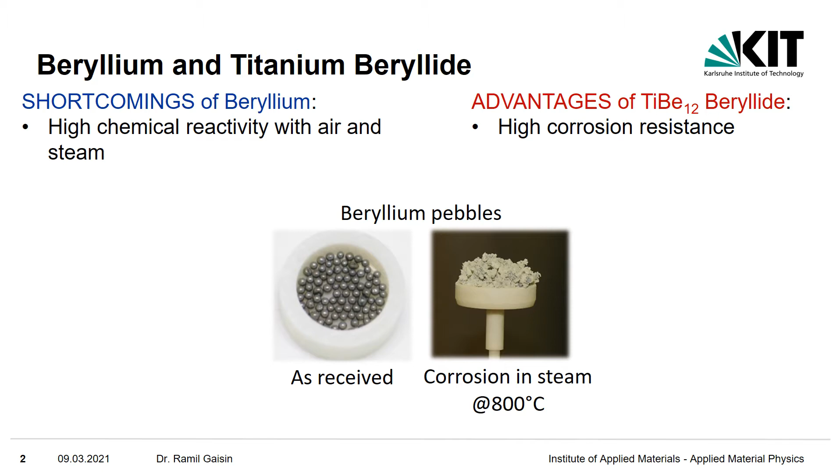For a long time, beryllium was considered the main candidate for neutron multiplication in fusion reactors due to its unique physical properties. However, metallic beryllium reacts strongly with steam and air, as shown here below. Under neutron irradiation, beryllium was intensively forming a very high porosity.

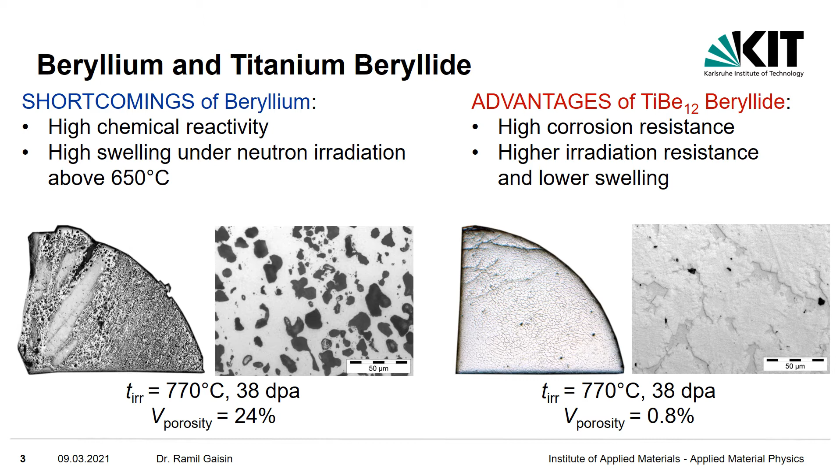All these advantages of titanium beryllide allow it to change the blanket design. I will show you this in the next slide.

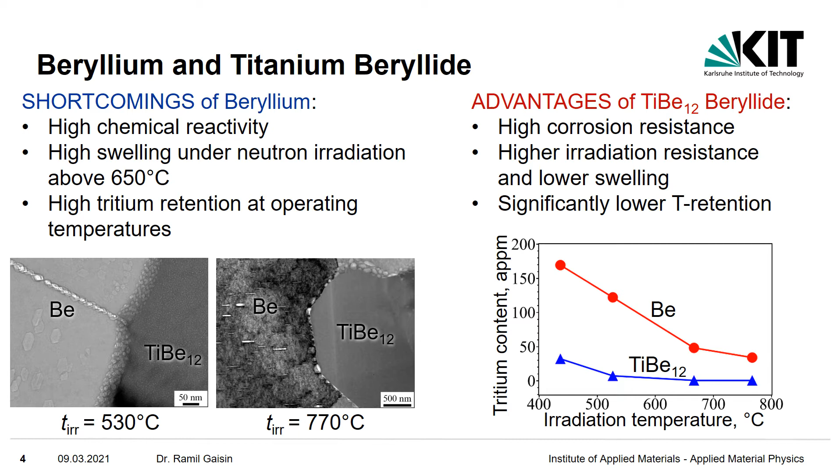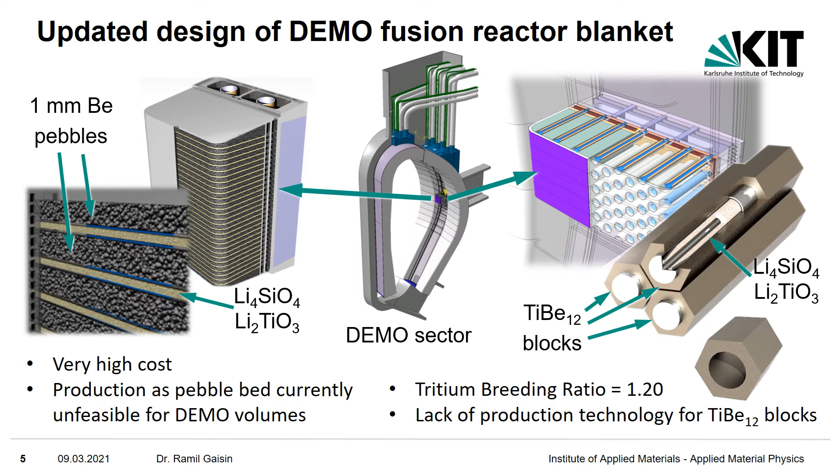The switching to a new material, titanium beryllide, significantly changed the blanket design. Now, beryllide blocks should replace beryllium pebbles for neutron multiplication. Due to a higher packing factor, this design provides an even higher tritium breeding ratio, meaning more fuel for the fusion reaction. The only problem was the lack of technology for the production of such hexagonal blocks from beryllides.

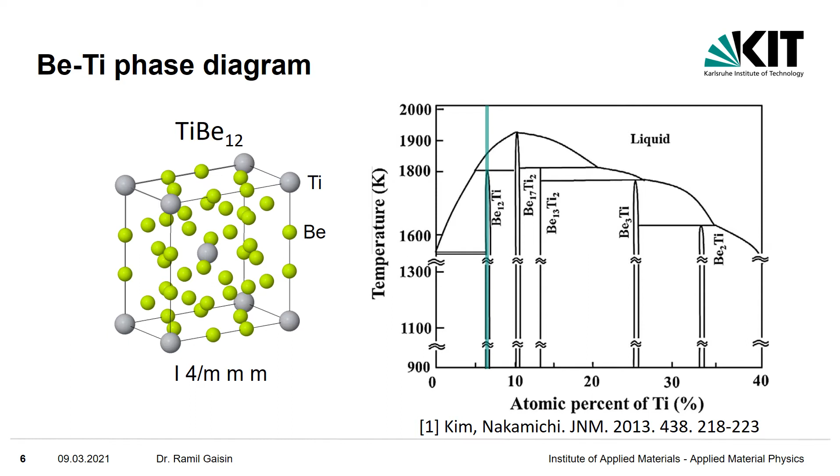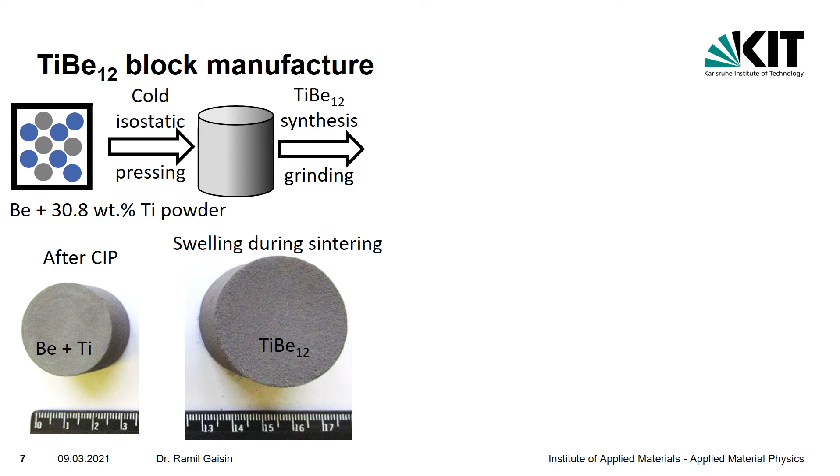That is why we focused on the powder metallurgy route. In the new technology developed in Ulba, pure beryllium and titanium powders are blended together and pressed at room temperature into tablets. During the following beryllide synthesis, these tablets swell intensively, forming a porous material with a low density. But this beryllide can be ground to titanium beryllide powder.

And in the next step, vacuum hot pressing of this powder results in a solid, dense material, which can be machined to its final size and shape.

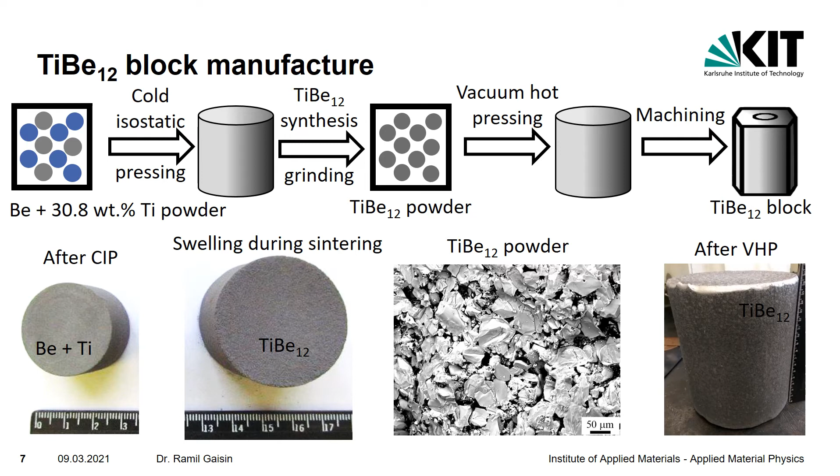At the moment, several blocks of titanium beryllide have been manufactured in industrial conditions using industrial equipment at the Ulba Metallurgical plant. They have a hexagonal shape with a central hole. They are quite large, with 144 mm in diameter and 150 mm in height.

The material has an almost single-phase titanium beryllide with only traces of beryllium and beryllium oxide. It has a very low uranium content, which means there won't be long-lived isotopes after working in a fusion reactor. The obtained beryllide is a quite lightweight material with a density less than that of aluminium.

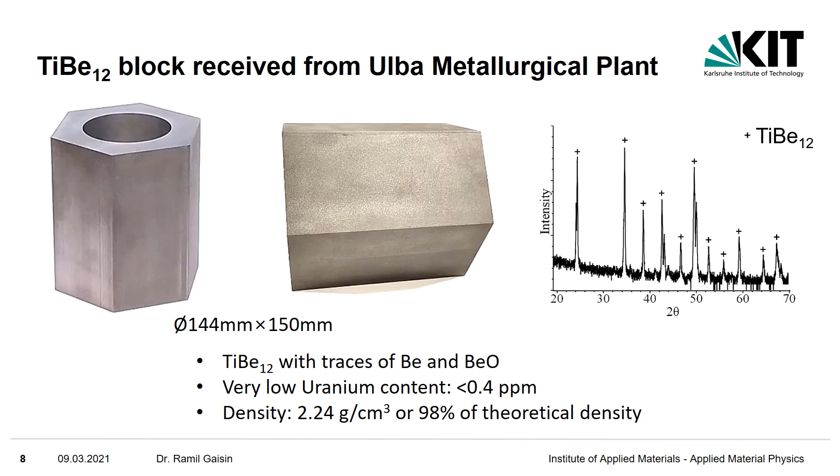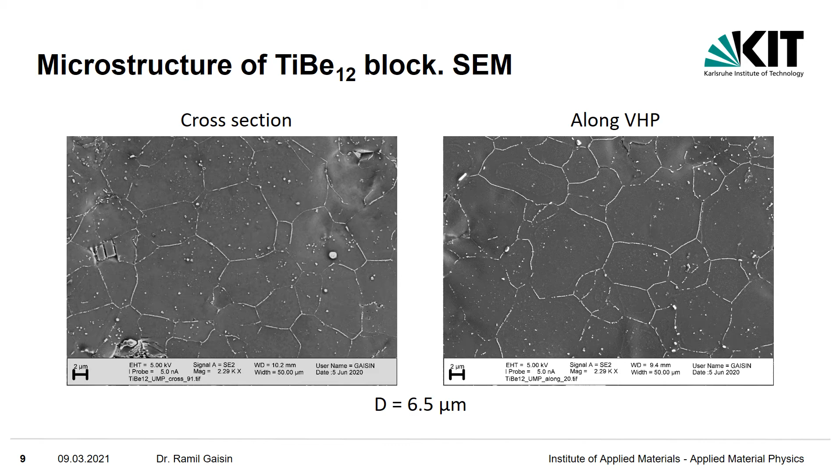There are no visible differences in the microstructure along and across the pressing direction. The mean grain size is measured as 6.5 microns.

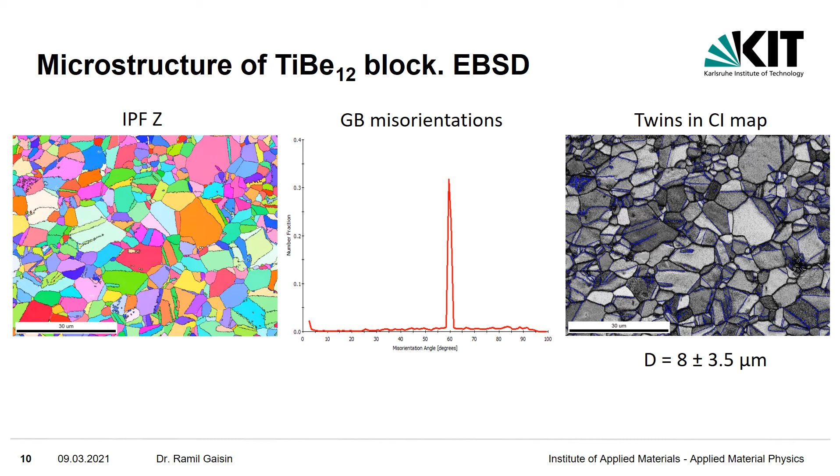In the right image, the twins are highlighted in blue, and disregarding these twins, the grain size was determined as about 8 microns. This is quite small, taking into account the high pressing temperature of 1250 degrees.

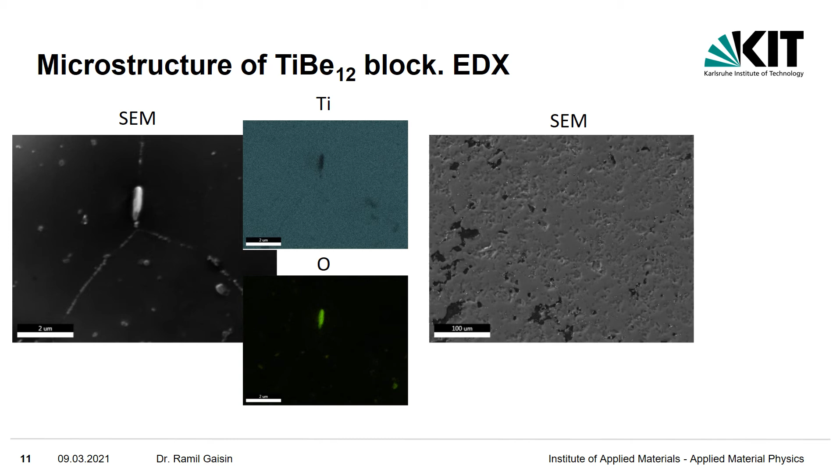At lower magnifications, larger dark areas can be detected, which are composed of beryllium, and this means that there was an excess of beryllium before beryllide synthesis.

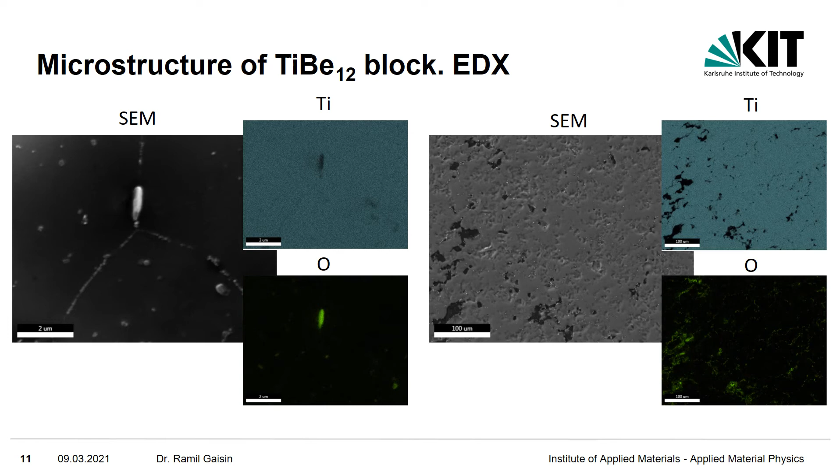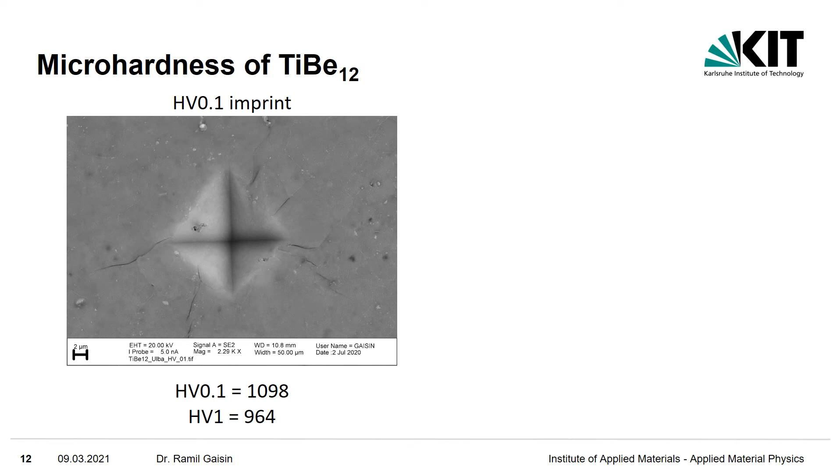Titanium beryllide is a very hard material with about 1000 in Vickers. There are many cracks extending from the impression. They propagate both along grain boundaries and within grains.

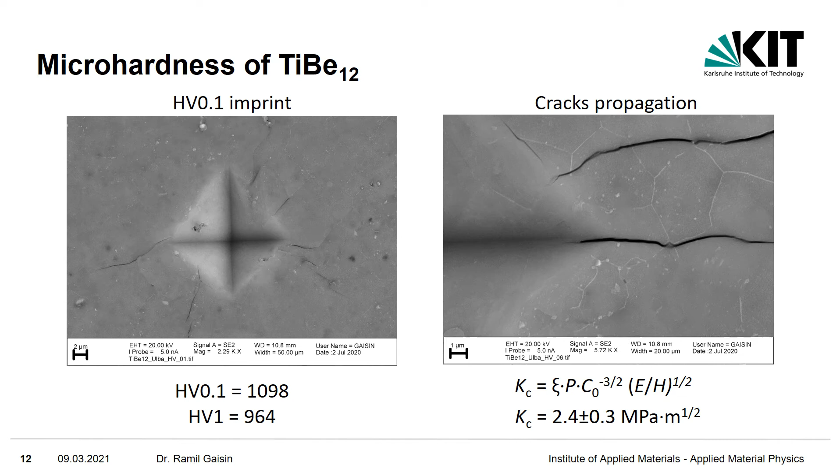Titanium beryllide is considered a functional material for fusion reactors. Therefore, it does not have strict requirements for mechanical properties. However, this is of interest to the aerospace industry.

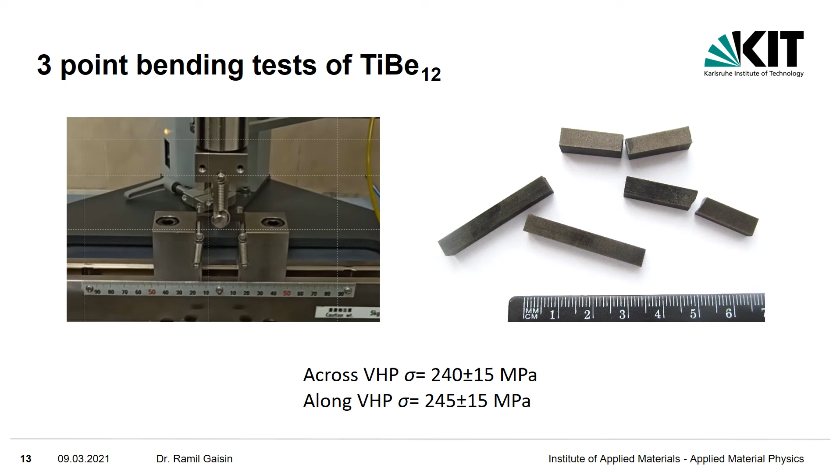3-point bending tests were performed at room temperature. They did not show any significant difference between the two directions of testing, across or along vacuum hot pressing. The flexural strength is about 240 megapascal, and this is typical for beryllides.

Compression tests of beryllides were carried out at room and elevated temperatures. Taking into account its low density, the material shows a very high compressive strength of about 2000 megapascal at room temperature and about 1000 megapascal at 900 degrees.

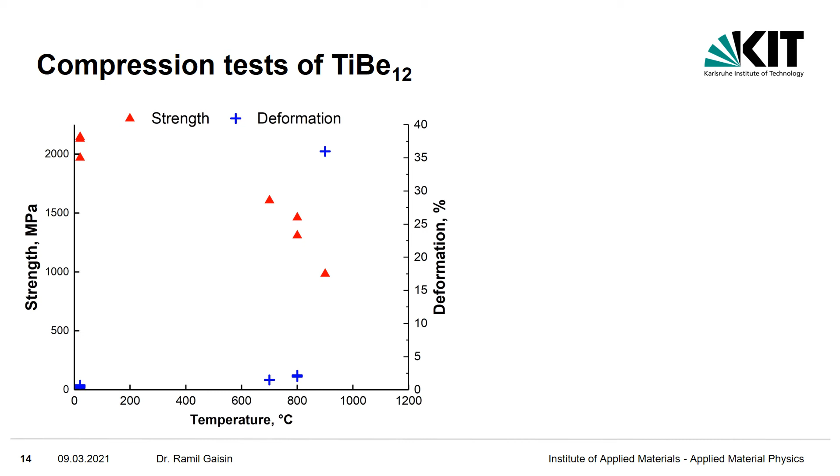The material is brittle up to at least 800 degrees, and at 900 degrees the beryllide deformed plastically. The experiment is still ongoing and not yet completed.

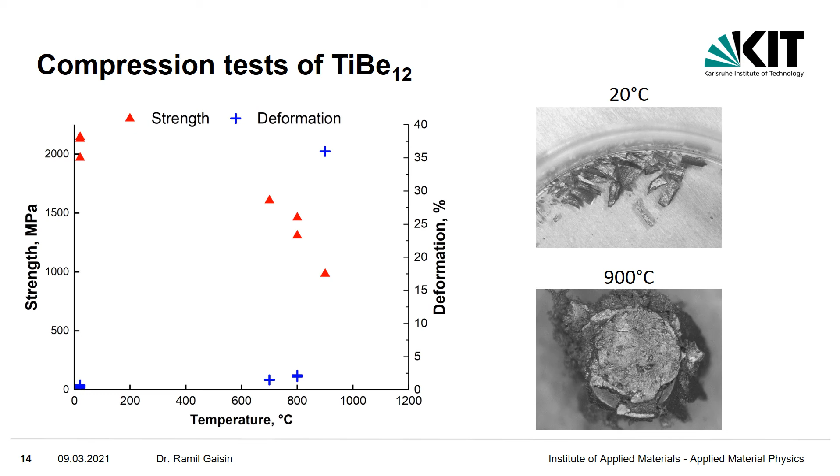During operation in a fusion reactor, the beryllide will experience pulses of rapid heating and cooling. To simulate this, the beryllide block was split into several pieces to form several current circuits for rapid induction heating.

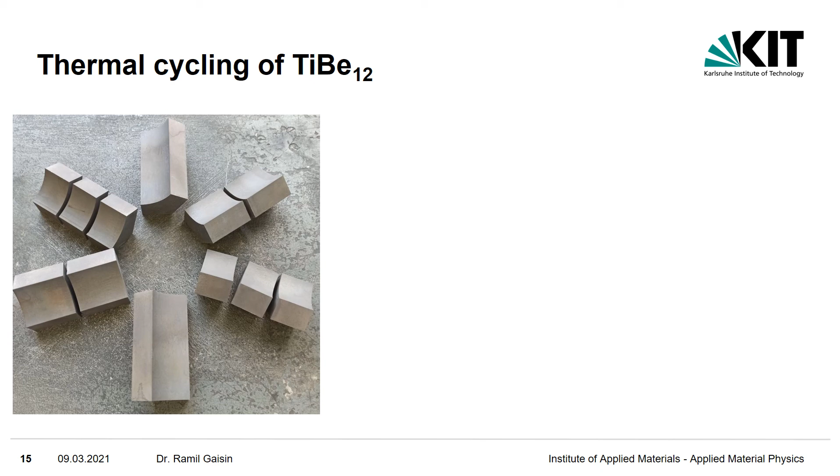A water-cooled steel pressure tube was installed in the center hole for rapid cooling, and this picture shows how it looks during the thermal cycling in a chamber of an induction furnace.

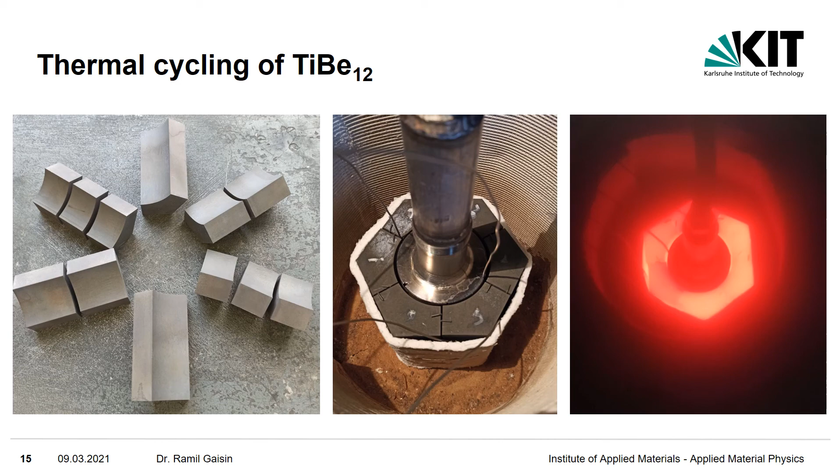The next slide shows a typical one-day thermokinetic diagram with 7 heating cycles up to 920 degrees and rapid cooling between cycles to about 350 degrees.

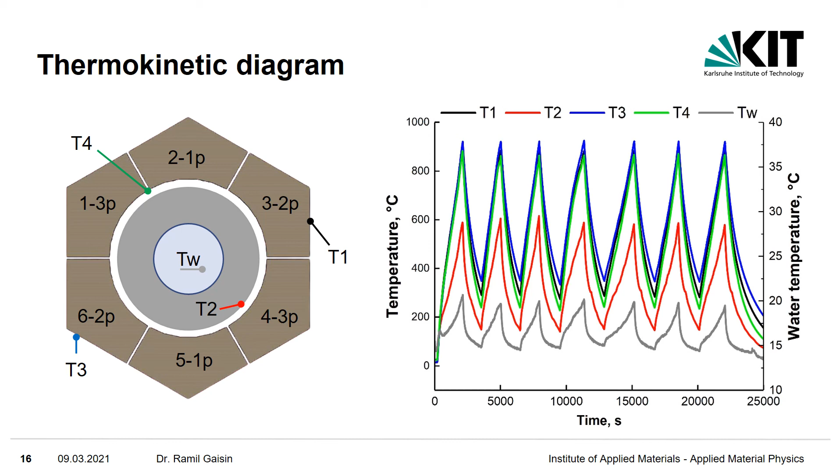As a result, titanium beryllide did not fracture and there were no cracks on the surface. This means that the material can withstand at least 205 thermal cycles in rapid heating cooling conditions.

In the next step, we'll improve the setup configuration and increase the number of cycles to thousands.

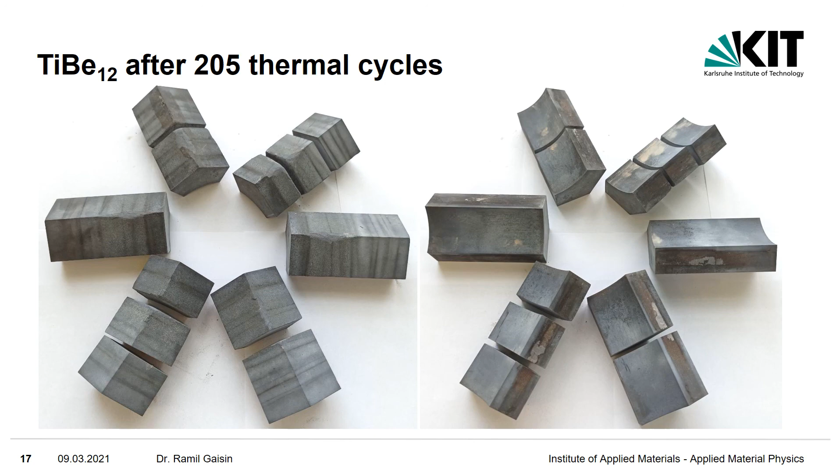Thanks to these outstanding properties, low density, high strength, oxidation resistance, such beryllides can be used as high temperature materials for air and space applications, and we are open here for any cooperation.

We hope to test our blocks in the ITER test blanket modules under neutron radiation in fast heating cooling conditions. We believe that the full potential of the material will be unfolded in DEMO and further fusion reactors.